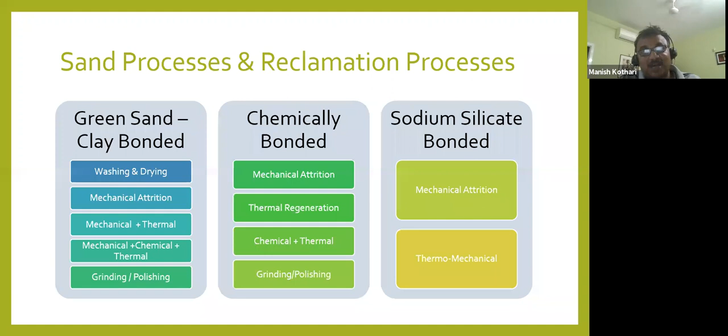We have to see the economics recovery in context of what is happening in India, so we have to see from our side whether it will work or not.

As I explained in the sodium silicate process, there are two aspects I've always looked at: one is technical, the other is commercial. Technical feasibility is the first part. When we are doing mechanical thermal reclamation of green sand, I've received a lot of inquiries asking if we can do the sodium silicate process in this too. The answer is clearly no, because it's not exothermic in nature. It's an inorganic binder, so it does not burn off, and it will not get reclaimed in the thermal system the way chemically bonded sand does.

So thermal has been ruled out as of now. The process currently being done with thermal was only to dry or heat the sand to some extent, followed by mechanical attrition. But that was for ester cured sand, and we don't have much data on that subject since that process itself isn't very popular in India.

The other approach, mechanical attrition, which we developed in the late 90s and 2000s, we've sold a lot of machines for. There were requests to make it mechanized and fully automated. Over time, since I was involved in installation, commissioning, and customer interaction, I started noticing the dust was very aggressive.

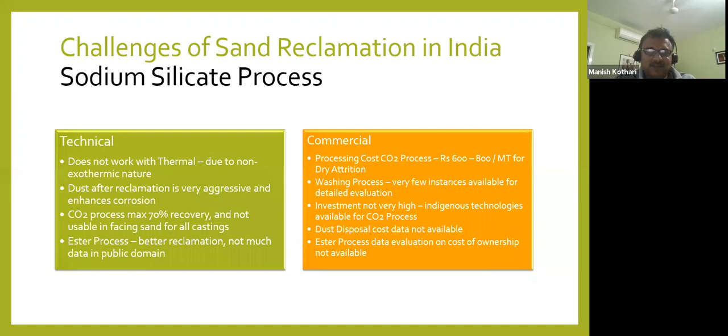Dust disposal cost data has not been available because this process has not been so popular, and not much information is available on this. So this is as far as the sodium silicate process is concerned.

I'll reach the green sand process last because it has much more interest, I know. But let us finish what we know to some extent and see how these 3 different categories of sand processes are being done. If there is any question, or if I'm not very clear, please ask now so we don't miss the chain of thoughts.

So the chemically bonded process is well established, proven for phenolic, furan, resin coated. Alphaset is a process which still is not very well proven in our country today for multiple reasons. One is the cost of sand itself, which is used in Alphaset, and that's the basis of why Alphaset became popular, is not very high.

And the reclamation cost of Alphaset process is more than the cost of new sand, so that itself is a no-starter for establishing this process in our country. And it is not only the cost of the chemical, which we may be importing right now, but also the energy and gas consumed in the thermal process, which make it not so feasible commercially right now.

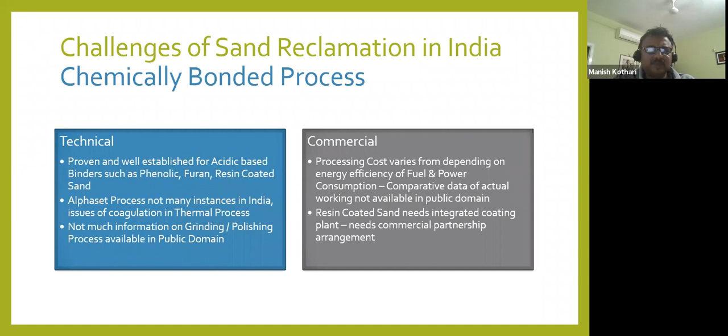So the most discussed topic is about green sand reclamation, and it has been about 7 years that I've been going across the country and collecting information since 2013 or 2014, 6 years now.

When we started to work together with PATA, who have been in this business for the last 25 years or more, they had a lot of experience, but their experiences were of installations in Europe or in Mexico or Brazil, which were huge plants - 5 tons per hour, 10 tons per hour, 12 tons per hour, 25 tons per hour.

So there was a need to see whether this sand could be used in India and what were the commercials. So I tried to put these two parameters together. On the technical side, there was not enough data on historical performance in India, not much process validation, and therefore the processing cost data is also limited.

The return on investment, and whether the sand is being used for molding or for coring or for core making, different AFS sand, what happens to the Indian sand - there were so many questions, and not much information has still been put together for India. Probably we as foundry industry may like to work on this part and collaborate with each other to put this data together.

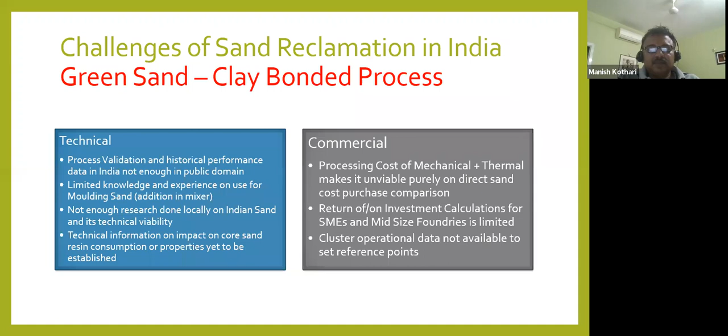So when I started to work in India on the green sand reclamation, I started getting a lot of generic questions, and these were some of the questions which were there in the Google form also, which Sandeep ji shared with me. Whether it will work with Indian sand or not. Where is it working in India?

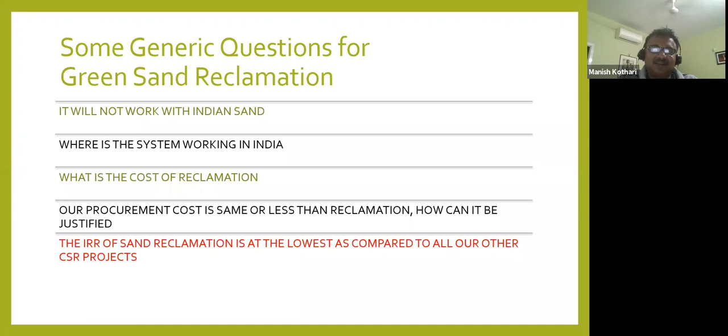There are foundries who may be consuming 100 to 200 tons of sand every day. For them, they have so many projects on pollution management that the internal rate of return, and this is something which I learned as I discussed with some large companies.

Yes, Mr. Manjunath, you have some question? So I see some hand. So maybe you can put it in the chat box.

So the internal rate of return would not allow the project to take priority. It would end up almost at the end of the list, because every organization has multiple needs, and there are so many things an industry has to do to continuously manage their pollution and environment policies. So this last question was something I found people asking me: how to increase the viability.

And again, even if I gave the reports that this is working in Europe or in South America, our sand is different. We need trials on our system. Even after we had done the pilot test in our own country with our Indian sand, one foundry will say that the sand of that foundry is different and our foundry is different.

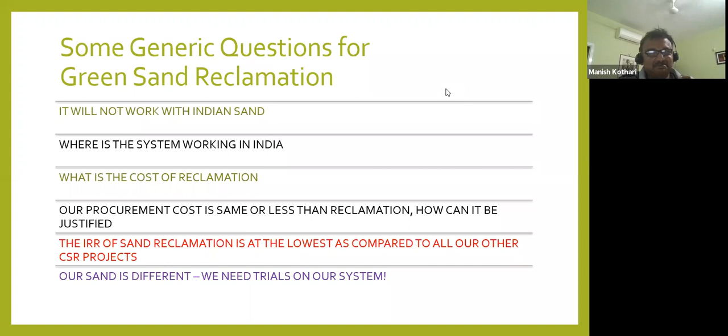So the question which Krupal has asked is about whether the process parameters change if sand is changed. That's why this last statement, our sand is different. The sand is different because our purchase specifications may be different, our source of sand may be different, our shape of sand may be different. So sand may be different, but the process is same. What we put in is what we will get out of the system.

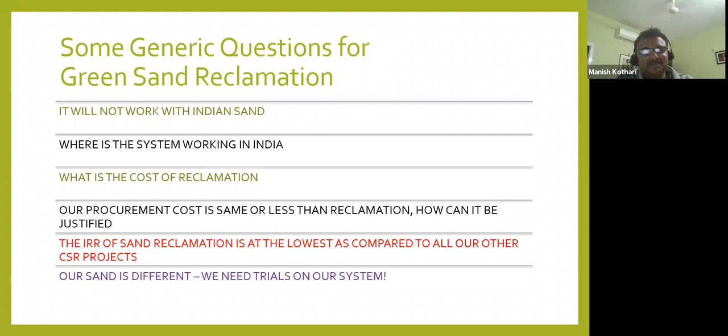But I then put a question on the other side. From my perspective, when we are taking the cost of sand, these are the questions which I used to ask: accounting the cost of rejection to the cost of sand. And this is probably where process people in the foundry may be able to answer. When this Allahabad mining was stopped, there was change to sand from Rajasthan, which was mined and crushed sand, which was angular and probably not as good as the original Allahabad sand. But the foundry adjusted to it.

Similar was the case in West Bengal. They said, we are getting sand from Allahabad, but our sand from Bankura is also good enough and it is cheaper. So my question to them was, then why did you use Allahabad sand for so many years? If Bankura sand was good enough, that means you are making a loss. So there is something between the two which is not documented, and probably foundry people may be able to look at it and come out with this figure to justify the cost of sand. So cost of sand is not only the cost of purchase of sand.

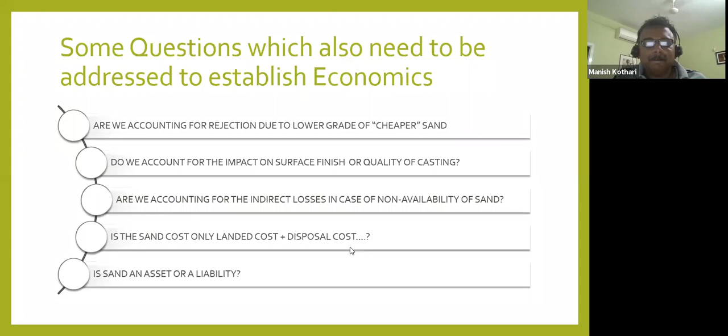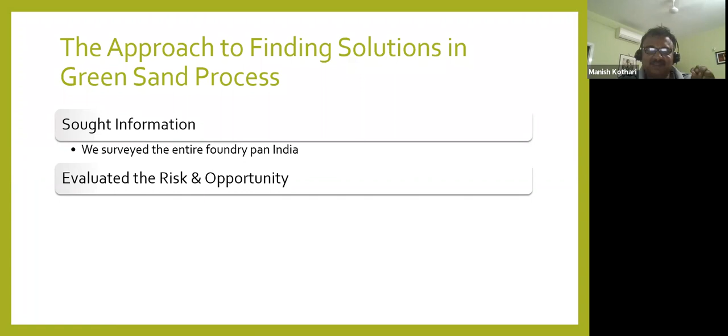So what I did, and as an organization, we got the information. I collected a lot of information, understood the risk, understood the opportunity. What does the market need? What are the solutions available? So now I'm moving to what we supply, because I don't know about the other products. I can talk about the solutions we have done.

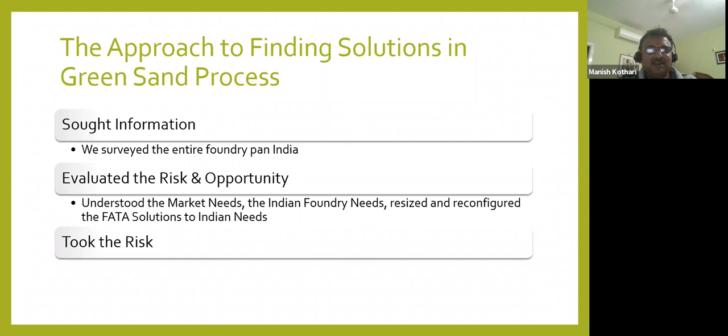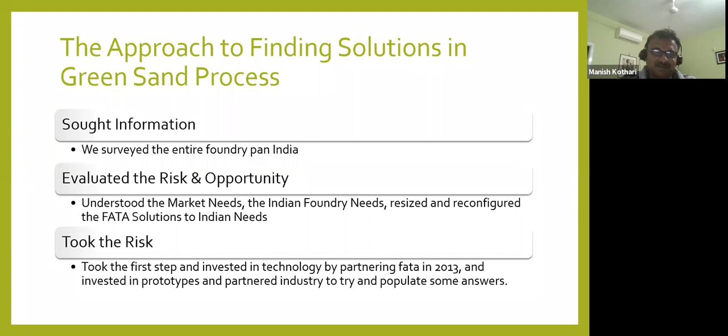So to understand that, we sought the information, understood what are the risks, and then when I started to understand that all the questions cannot be answered without a plant in India, together with FATA, first we partnered them and then invested in prototypes and set them up in our own premises in our factory rather than going into any cluster model and for a very long cycle. We wanted to reduce the cycle, and we set up this facility over here and started to document environmental impact and economics, which is equal to sustainability.

So the entire exercise moved from pure economics to a combination of environment and economics, because a pollution board would say that I can stop the foundry, but I cannot, because ultimately, if it is not affordable, how can I stop the foundry?

So these questions remained unanswered, and that's where we really tried to look at sustainability as the key driver, because even today, if you talk, it's all about the sustainable development goals from SDG 1 to 17. Every goal has a different target.

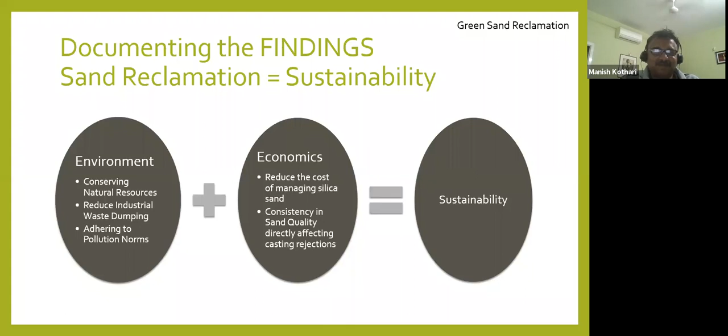So first was the environmental factor, which I started to calculate. This came from my experience in energy efficiency innovation. When I was participating in energy efficiency, I was asked the question, what is the environmental impact? Till then I was a machine manufacturer, and as a machine manufacturer, I was not looking at environmental impact. So 2015 is the period when I started to look at what could be the impact on the environment,

on the CO2 emission. And when we see in COVID today, somebody sends me a picture that I can see the Himalayas from Jalandhar. So you can imagine the environmental impact which has been happening, and today we can see what it can do. So can we start to look at what actually is the environmental impact? How many kgs of CO2 emission are we putting into the air when transporting the sand by 400, 600 or 800 kilometers? And this is plus the natural resources part.

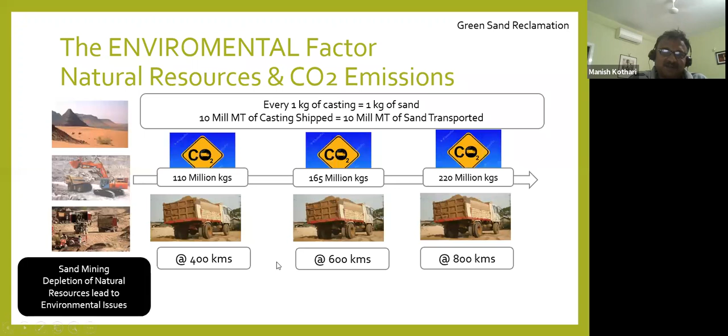The second was to understand the consumption. So I made a generic calculation. If I go to a foundry, for example Kirloskar Ferrous or DCM, the core sand consumption would be almost 1 kg per 1 kg of casting, 1:1 or 0.8 to 1. The tractor industry would have a different characteristic. And then there will be low cored items where your consumption may be nearly 0.1 to 0.3 kg per kg.

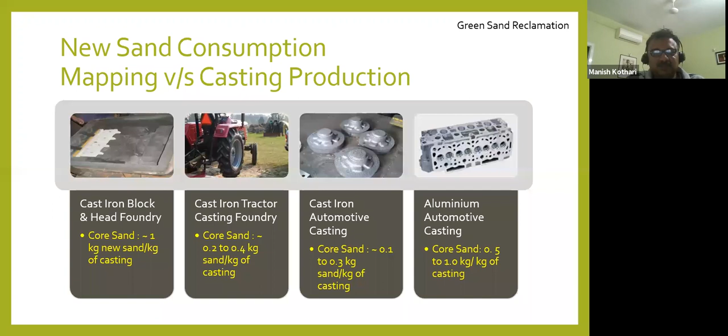So mapping the type of foundry with the consumption of sand is an exercise which the foundry could do to understand the need. Whenever you pick up a component or a section, you could identify the quantum of sand you need within that cluster, how much sand is going to be purchased, what is the disposal; all those data could be put together. And there was the aluminum casting consumption. So this is what I could understand from my own survey.

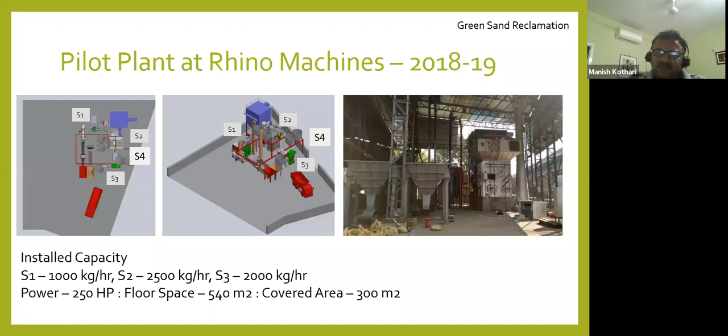So 2018, 2019 is when we took the bigger step of setting up a cluster model of a sand reclamation plant, which a lot of people visited during the exhibition in Ahmedabad in 2018. We had started the plant in January, and there we demonstrated all the different processes for green sand and for core sand. We tested for alpha set. And in an area of around 540 square meters, we were able to demonstrate that and document all the data, which I'll share with you now.

And break down the process. So we started breaking down the process into parts and gave them names. S1 is when I'm using only molding sand. This plant has been installed at Aquasub in CRI, and Magna in Coimbatore is now putting up the second plant. This has been adopted very quickly. They are the first users of these plants in our country.

And Aquasub has now been using this for more than 3 years, integrated with the plant, where they are able to reduce their new sand addition in the mixer. This sand goes into the molding sand in the mixer. Aquasub is typically a pump casting manufacturer, where 50% of their new sand goes into molding and 50% into core.

Since the investment was lesser, there was a need to take a first step. So we co-invested; we also had a stake in that plant, and we set it up with their help. In a year's time, we were able to set up the process, and their new sand addition in the mixer, or their average consumption, has gone down by 50 to 60% already, and they reduced the dead clay level by around 40 to 50% in the reclamation process and balanced their sand.

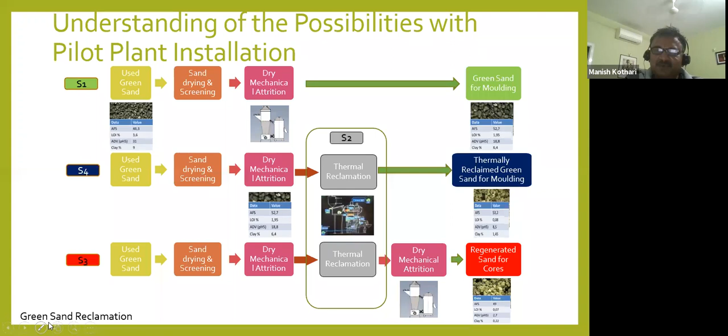It will take another 3-4 months before we can come with a good amount of data establishing the consumption of resin, the quality of core, the impact on casting. Yes, we can make core, but we want to establish the entire cycle before we go next. And we also establish the costs thereof.

So while the first process was costing around 1 rupee per kg equivalent for the new sand, it could replace 50% of the new sand. The S4 process could replace the entire new sand if we have sufficient sand, but the cost of the process is around 1.6, in which the thermal varies between 0.8 to 1.4 depending on the process, and for the core sand from mechanical, thermal, mechanical it is something like 2.6.

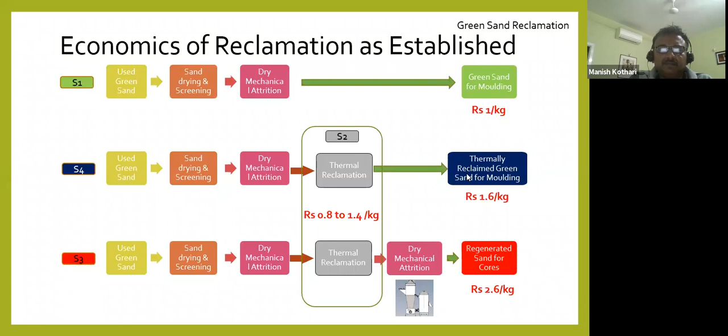This is one of the reasons why in Kolhapur, or most places where the sand mines are not very far, this process has not been established till now. This will give you a graphical presentation. There was also one more step we did, going beyond reclamation into making it a zero discharge foundry.

Whenever we did the entire reclamation, around 20% or 25% of dust was coming out. This was also a challenge given to us by one of the buyers. He said, I want 100% zero discharge; I can throw out sand, I cannot throw out dust. We have been able to put this plant up in our factory now. We have made bricks using 75 to 80% dust and 20 to 25% plastic, so it's 100% waste used for making these bricks.

Now we are moving into commercial production as the pilot plant has been stabilized. The process has been stabilized, and we are now getting to production mode. If foundries can map the quantity of sand coming from different places, they would be able to plan the reclamation plant much better.

This graphical presentation gives four major areas: the knockout sand, the sand lumps coming from the sand plant, the excess sand which is thrown out, and the cores which get broken or rejected, or sand which is rejected, which can come here.

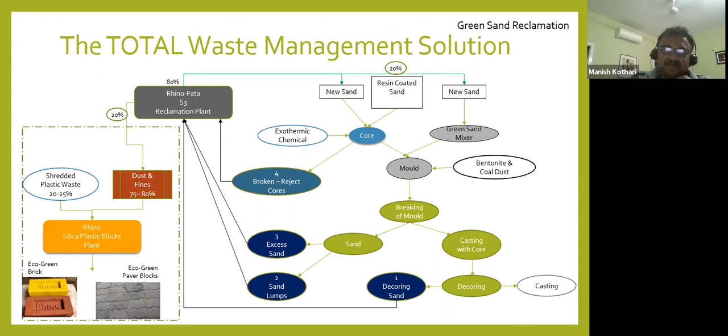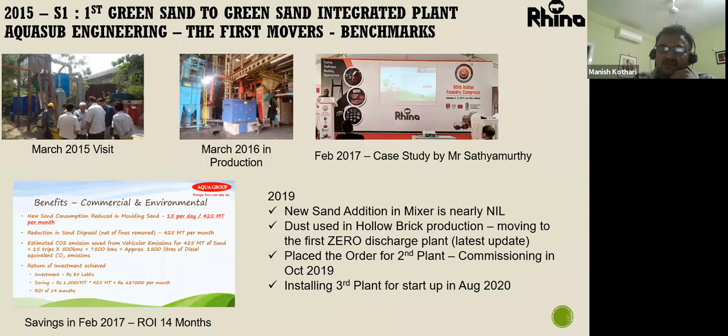These are some case studies. In 2015, Sathyamurthy visited the plant. In 2016 it was in production. He gave a presentation at IFC in Kolkata in 2017. Now they are looking at the second plant installation, and in their third plant also they are planning for this reclamation.

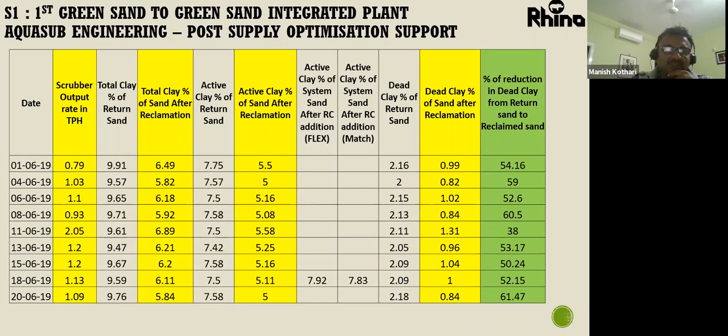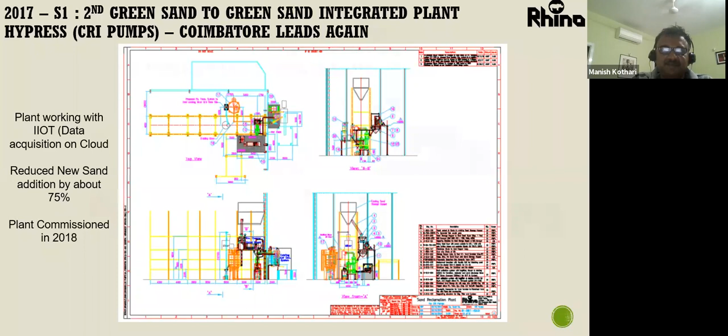This is the plant which is very similar to Aquasub, set up in CRI also in Coimbatore, commissioned in 2018. This is the plant which we installed and commissioned in January 2018 in our factory. And from this, we made all the trials of how is the original sand, what is the core sand, made cores out of it, made some trials with one of our customers in Anand, testing the scratch hardness and all the parameters.

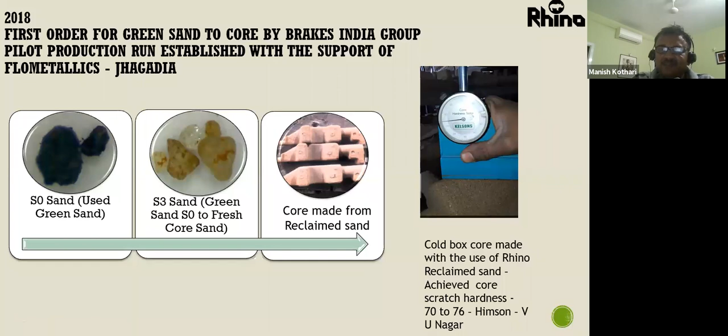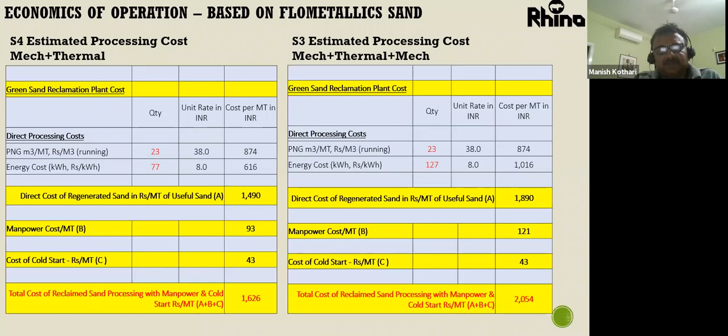And these are some of the direct costs. There are some indirect costs which have not been added. So depending on the sand, we could find what are different costs involved, and we try to arrive at the commercials of the process. We did some trial at Mahindra and Mahindra, sent some sand and made a trial, but we have still not moved ahead in that project. But we did some cores at that time, about a year back.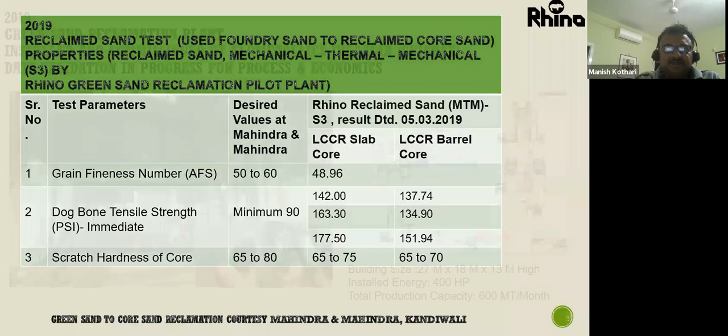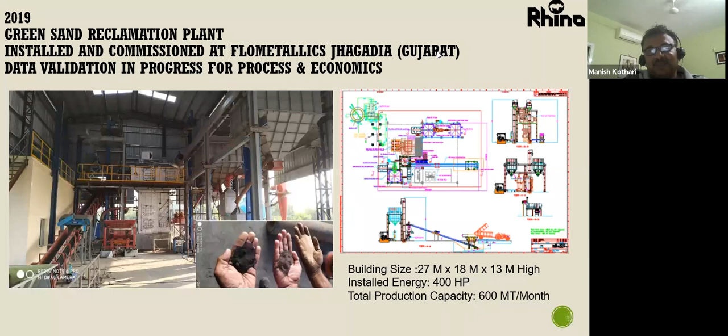And this is the installation which is now finally working in Flometallics Jhagadia. It's a complete turnkey project where it's not only the project supply, we also moved into the operations and management of that plant. So that entire 1 year or 6 months, whichever period they want, our team will be operating and transferring the operational knowledge to their team. First set up the process, establish the process, establish the cost, and then hand over to the team to operate the plant. So there is a good collaboration between the foundry and the foundry machine supplier, which is very important if we want to put this process into working.

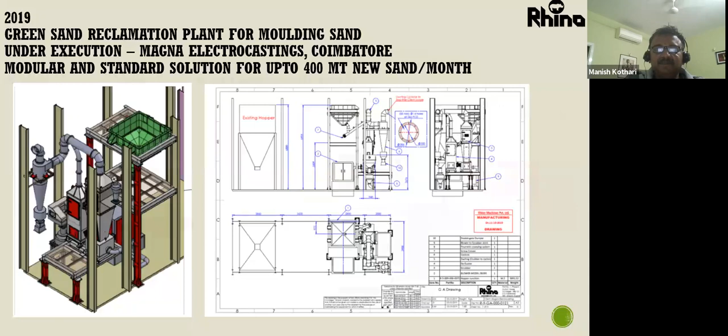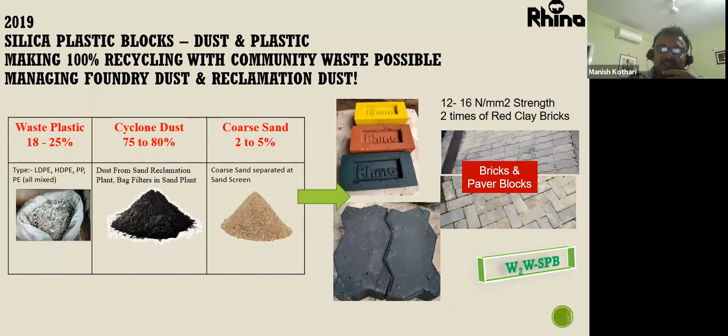This is the repeat order of Aquasub. So this plant is now for the green sand to molding. This is the configuration we are now installing in Magna Electrocastings. It's under installation right now. This is some data of the waste silica plastic blocks, paver blocks which we have been doing, and the strength is 2 times of the red brick, and soon it will be commercialized. So this is what I wanted to share with you.